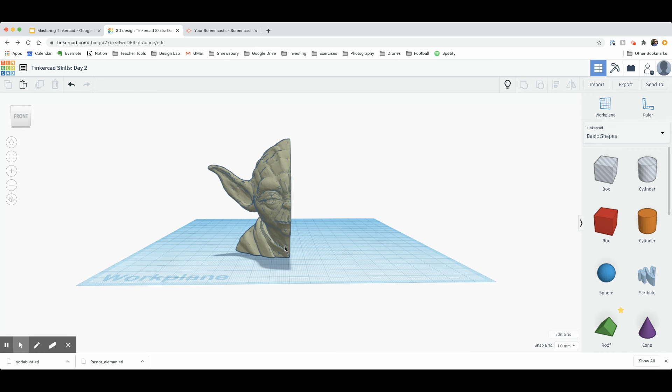So if I jump into Tinkercad, you see I have a little half a face of Yoda. Imagine I want to complete this face. I can click on my model, copy and paste another one in there, and move it over a little bit. Now up here, this is my mirror tool.

If I click on this, there are three ways you can mirror an object. This way flips them upside down, this way flips them front to back, and this arrow flips them left to right.

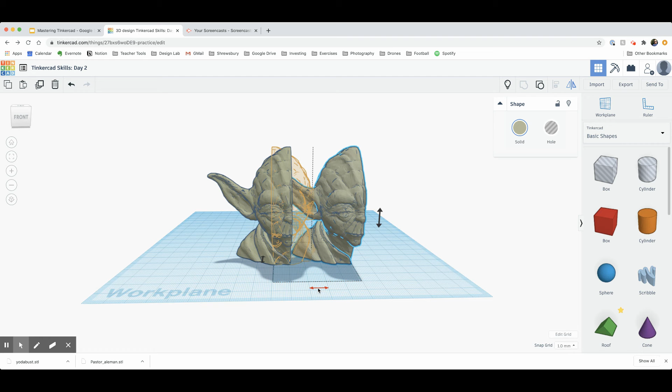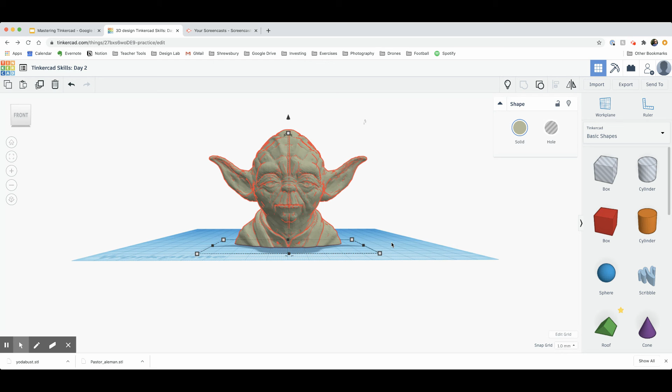For what I want to do, I'm going to click on this front arrow, and then move him in place, right about there. Now if I click both sides and group them back together, he's good as new. This isn't a tool we use too often, but it comes in handy when you need to take something and mirror it one way or another.

I'm going to get rid of Yoda and click my little light bulb to show some other things I have hidden. The next thing we have is the Align tool. It's incredibly useful — maybe the most important skill in Tinkercad.

If I click these little cylinders, imagine you want to line these up in a straight line. You can try to eyeball it, but it can be really hard. So if I click on my Align button up here, all these black buttons show up.

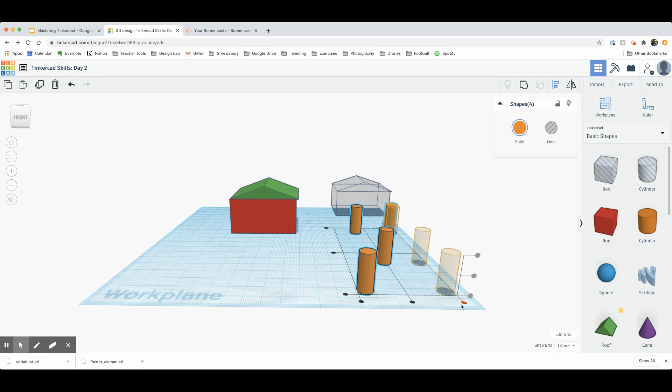Right now nothing is grayed out because this lets you align them by height, and they're all the same height. These buttons allow you to align them front to back, and the ones in the front let you align them left to right. So if I want them all in a line this way, I'll click on this middle black dot, and it aligns them all in that straight line.

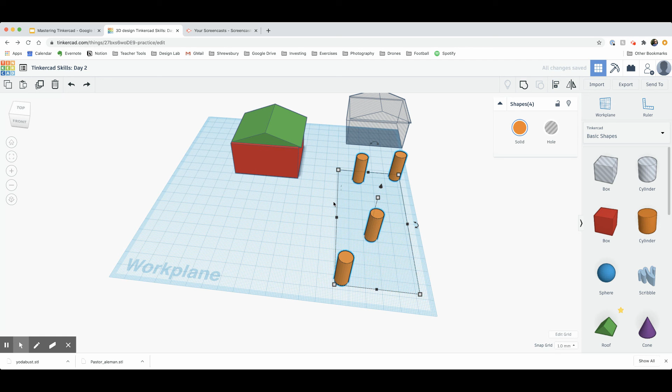If I had wanted to align them the other way instead, I'd go back to align and align them in the middle that way. I could do that as well. Usually you align things in the middle, but not always — you may want to bring them all to the front, or have them all go toward the left side. It gives you different ways of aligning your objects.

If you click the middle button for both sides, it puts all of them right on top of each other, which is oftentimes what we do. That's how we use this tool.

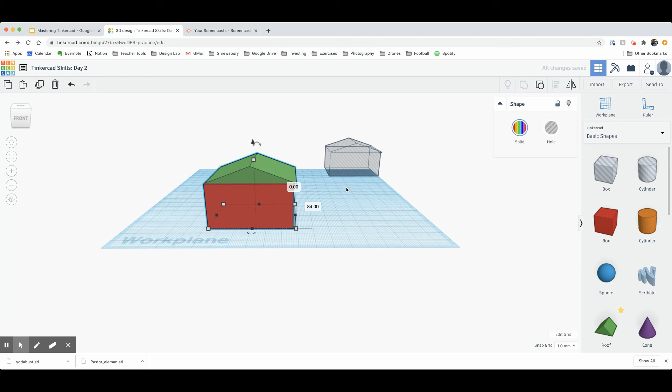To give you an example, I'm going to delete this. Here's a house, and I've already made a second version of the house that's a hole, a little bit smaller. Say you want your house to actually have an inside room. I can click on both of these, press my Align tool, press the black button in the front and then the button on the side.

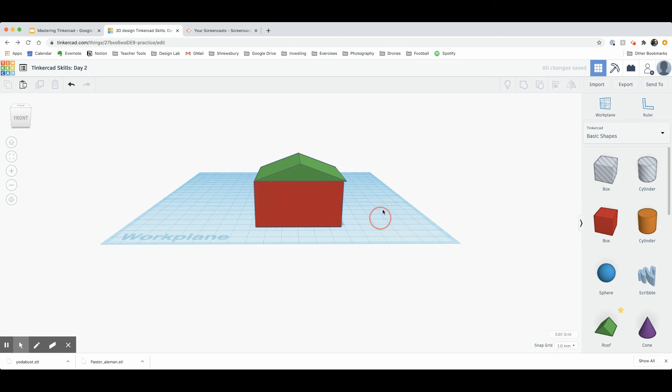Now they're perfectly aligned centerwise. I'm going to group them together, and as you can see on the bottom, there's a hole in the middle of the house. If I make a little door like this and group that with my home, you can actually see now inside of this house — there's a little room that's perfectly centered on the inside of your house.

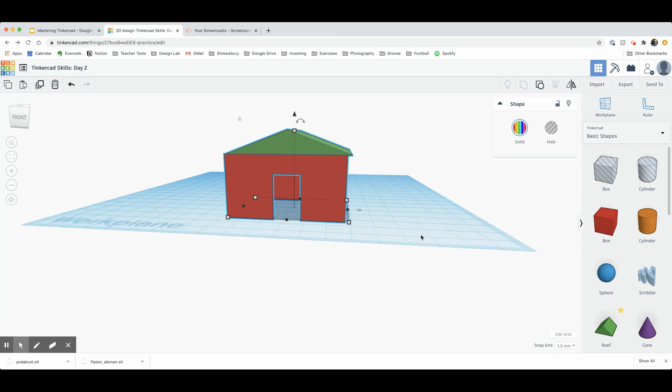So when you are trying to line things up, please do use the Align tool. It is incredibly useful, it saves you a lot of time, and you do a much better job aligning the different objects. Thank you for watching.